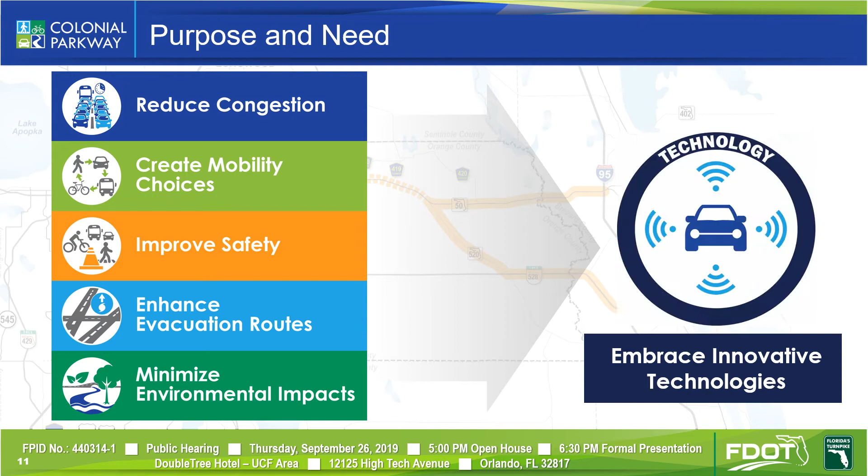The project is located in eastern Orange County along State Road 50, also known as East Colonial Drive. The project starts just west of State Road 408 and follows the existing State Road 50 corridor east until it connects with State Road 520. The length of the project is approximately 9 miles. The existing State Road 50 is 6 lanes from Woodbury Road to Avalon Park Boulevard. East of Avalon Park Boulevard, the 6 lanes reduce to 4 lanes.

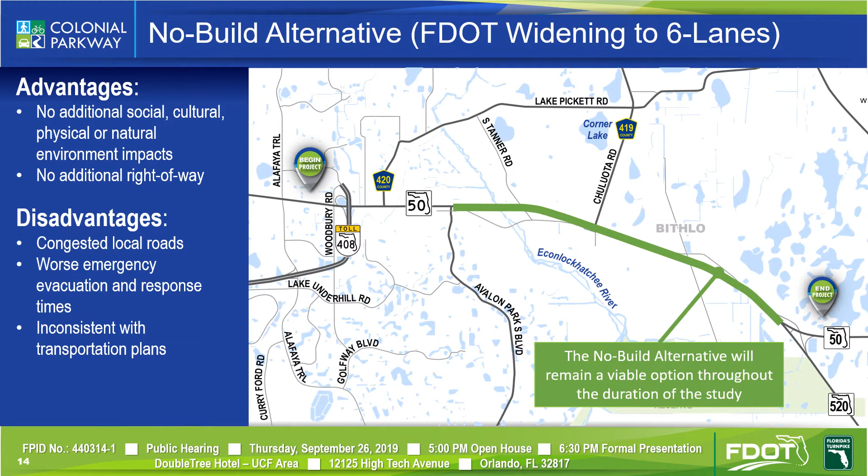The no-build alternative is just as it sounds. What happens if the Colonial Parkway project is not built? For this study, the no-build alternative assumes projects previously approved in the study area would be constructed. Along State Road 50, the no-build alternative includes widening State Road 50 to 6 lanes from Avalon Park Boulevard to State Road 520. The no-build alternative does not include any improvements between Woodbury Road and Avalon Park Boulevard.

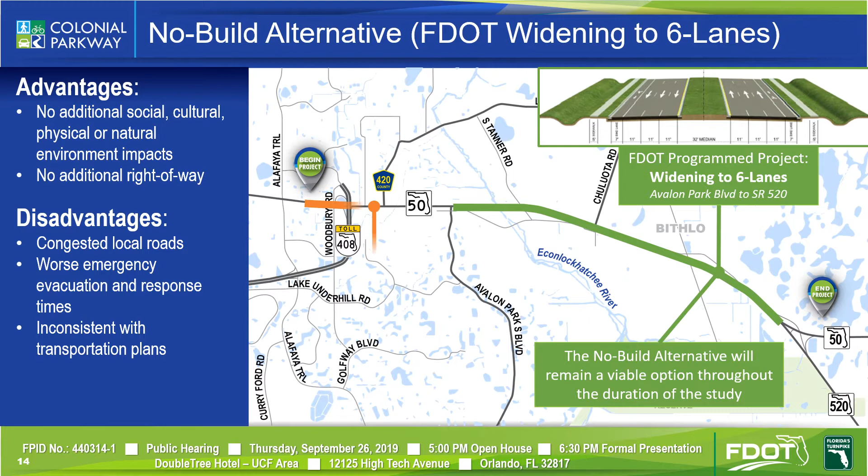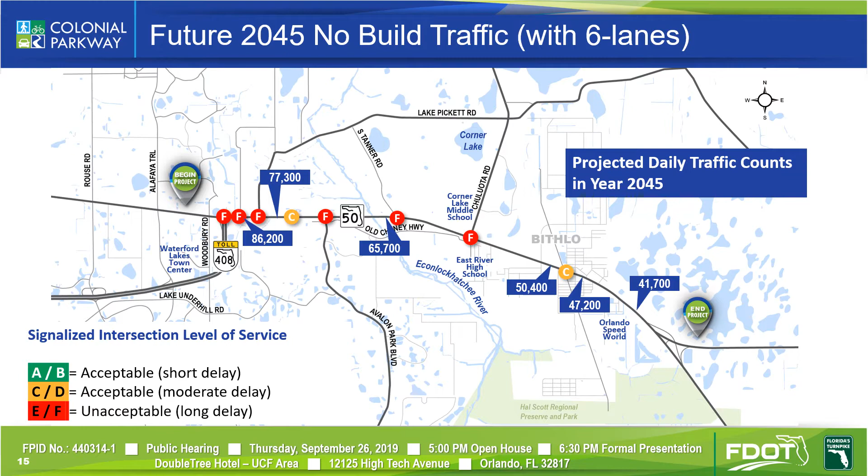Preliminary traffic projections through the year 2045 indicate that State Road 50 west of Chuluota Road and most of the existing State Road 50 intersections will operate over capacity. The no-build alternative does not meet the capacity for the 2045 traffic demand and therefore is not the preferred alternative. Now, let's review the study's preferred alternative. The PD&E study began in September 2017 and was followed by a public kickoff meeting in November 2017. The study alternatives were shown at the public information meeting in May 2018. Since then, study alternatives were refined to decrease environmental and right-of-way impacts to improve the overall design.

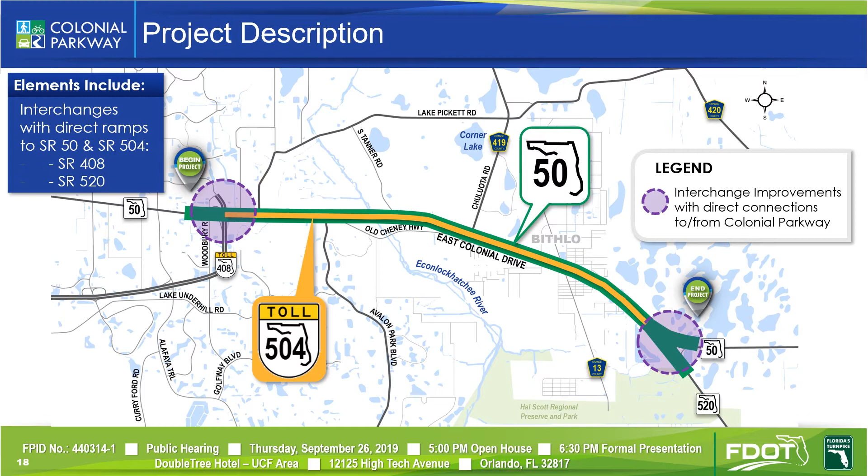The Colonial Parkway proposed improvements include a new tolled facility known as State Road 504 that will be built in the median of the existing State Road 50 corridor. 2 new toll lanes in each direction will be included from State Road 408 to State Road 520, with connectivity to State Road 408 and State Road 520. The project also includes proposed stormwater management facilities such as new ponds and modification of existing ponds.

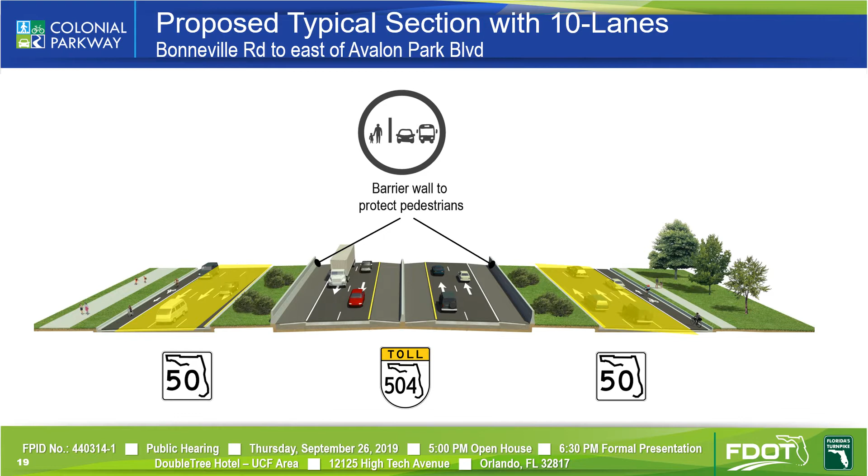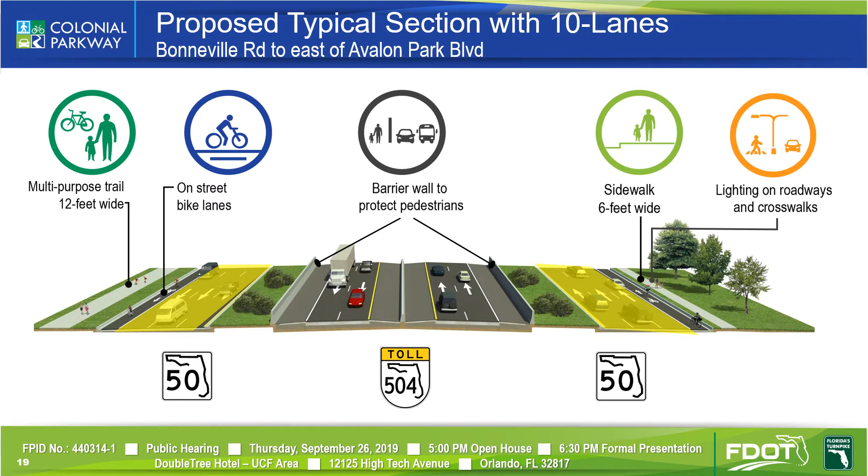The existing State Road 50 lanes will be reconstructed and shifted to the outside as frontage roads. Between State Road 408 and Avalon Park Boulevard, there will be 3 lanes in each direction along State Road 50. Barrier walls will be provided to separate pedestrians from cars. Improvements also include a shared use path, sidewalk, and bike lanes in both directions. Lighting is a key element of reducing bicycle and pedestrian crashes, where over 50% of pedestrian and bicycle-involved crashes occurred after dark within the study corridor.

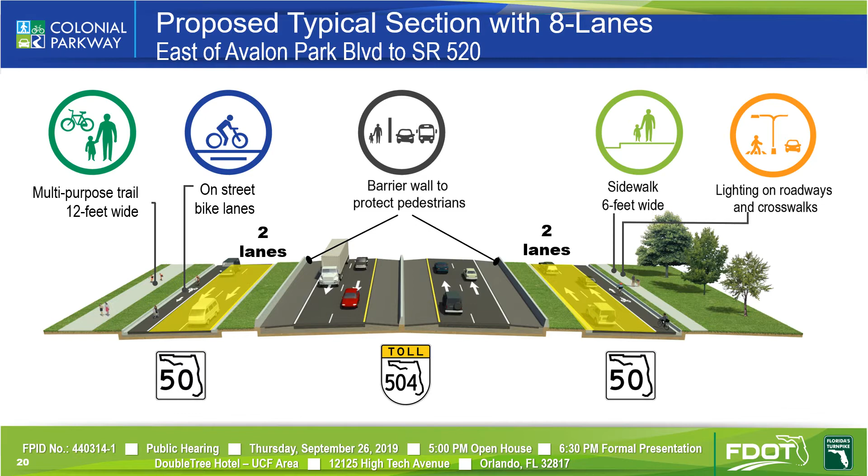East of Avalon Park Boulevard to State Road 520, the existing State Road 50 lanes will be reconstructed with 2 lanes in each direction. When approaching a bridge going over an intersection, the proposed State Road 504 toll lanes will be elevated on fill.

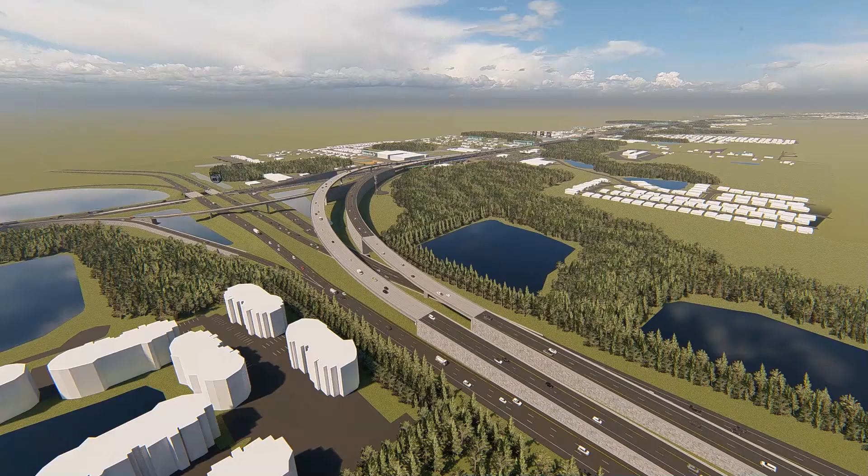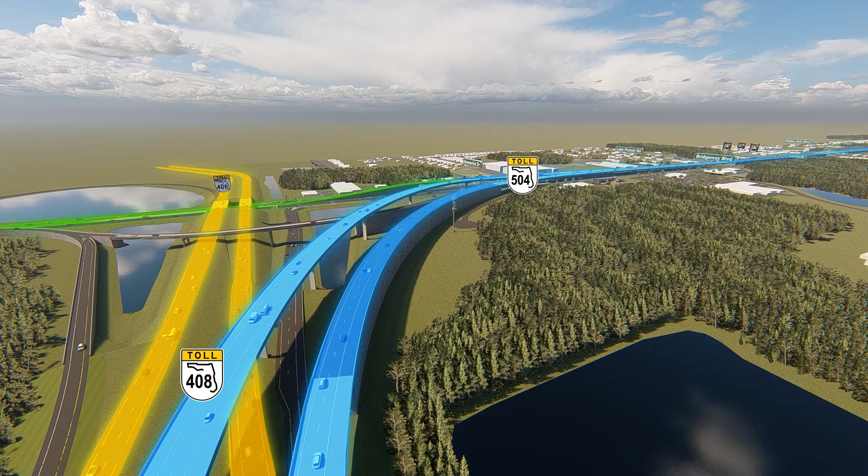To better illustrate how these proposed typical sections might look when constructed, here is a virtual tour of the preferred alternative. The project begins where State Road 408 connects to State Road 50 near Challenger Parkway, as shown by the lines in yellow. The lines in blue show State Road 408 connecting with the new State Road 504 toll lanes. Green lines indicate exit ramps from State Road 504 onto non-tolled State Road 50.

As you continue east, there will be 2 new toll lanes in each direction and 2 to 3 non-tolled lanes in each direction, almost doubling the capacity of the existing corridor. Whether you decide to pay a toll or not, you will have a better option to move through the study area and region.

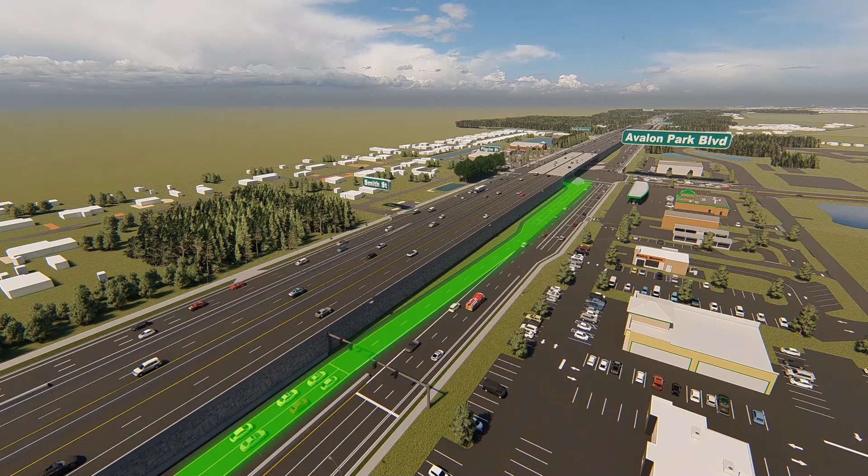Drivers heading east on State Road 504 will have 2 opportunities to exit the toll facility and use the non-tolled State Road 50 lanes. The first is at Avalon Park Boulevard, where drivers can also enter State Road 504 from State Road 50. East of Avalon Park Boulevard, the number of State Road 50 lanes reduce from 3 to 2 in both directions.

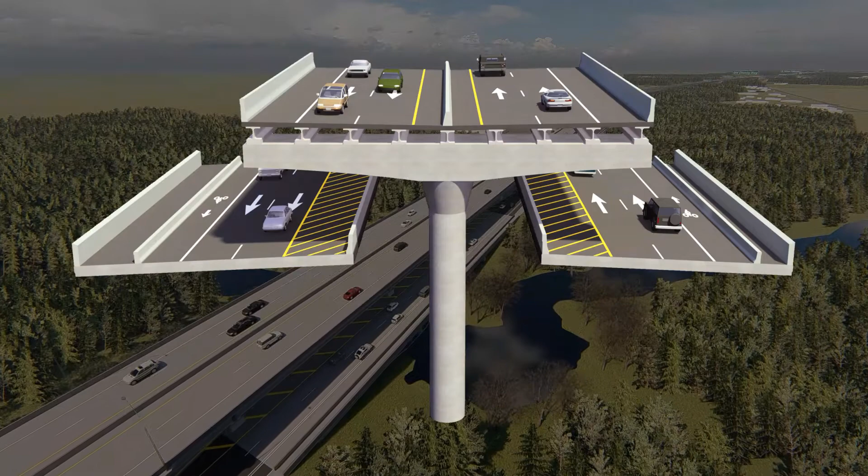The recently completed construction of Econlockhatchee River Bridge is generally preserved. The proposed bridge involves minor widening to the existing structures and constructs State Road 504 directly above the existing State Road 50 bridges.

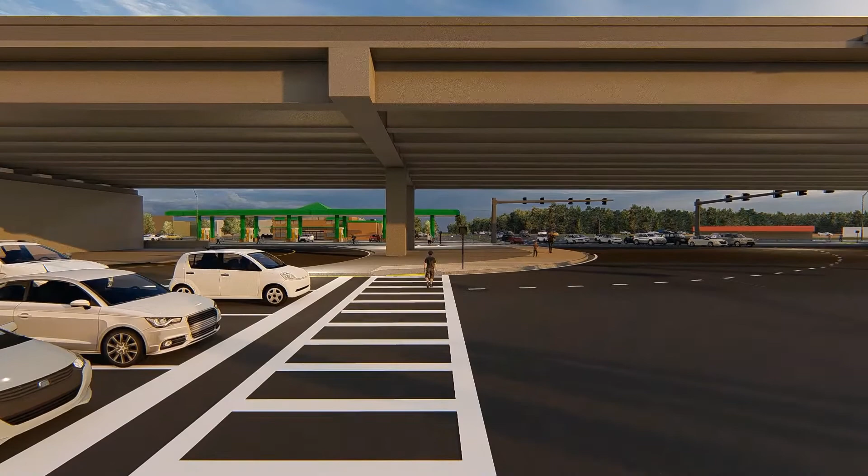Drivers going eastbound will have a second opportunity to exit State Road 504 onto State Road 50 at Chuluota Road. Local State Road 50 vehicles can also enter the toll lanes heading west at Chuluota. To improve safety of vehicle and pedestrian crossings, wide crosswalks are provided along Chuluota Road with pedestrian relief areas between the State Road 50 east and west lanes.

Improved intersections, such as at Chuluota Road, are part of the proposed access modifications to State Road 50, where vehicles will have opportunities to cross over, turn, and make U-turns on State Road 50.

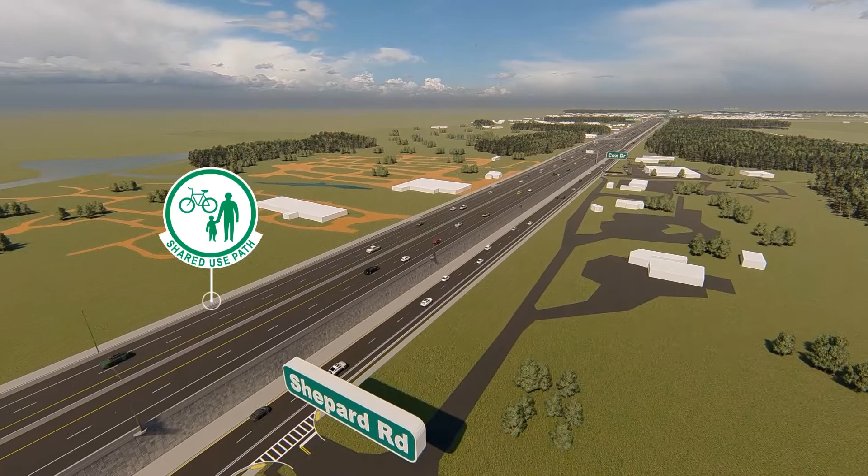As we saw in the typical sections, there is a shared use path for both bicycles and pedestrians on the north side of State Road 50, a sidewalk along the south side of State Road 50, and on-street bike lanes for bicycle travel heading in both directions. These pedestrian and bicycle improvements will connect local businesses and neighborhoods.

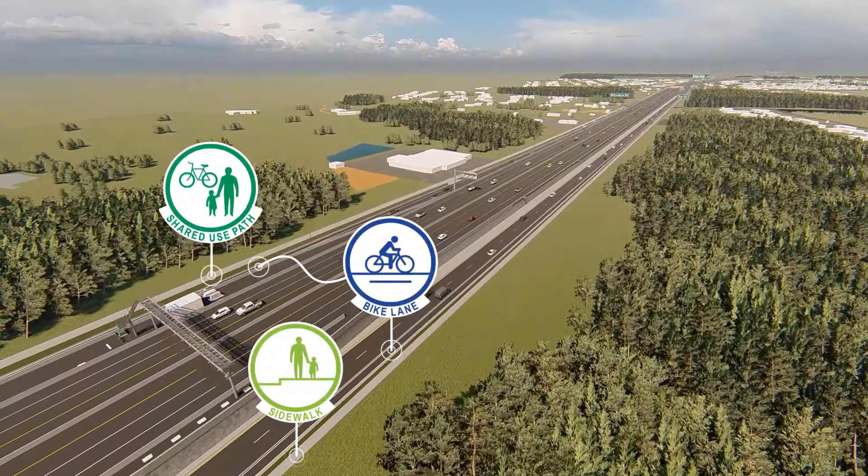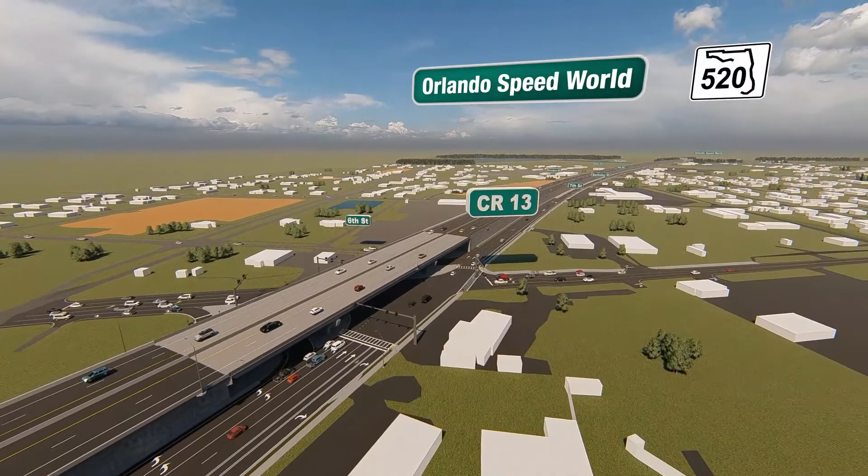Additional median crossing opportunities are proposed at County Road 13 and Orlando Speed World on the way to the connection with State Road 520, where the project ends. As we saw in the video, drivers can access or exit State Road 504 through the interchanges at State Road 408 and 520, and also at 3 local locations shown here: west of Avalon Park Boulevard, east of Avalon Park Boulevard, and west of Chuluota Road.

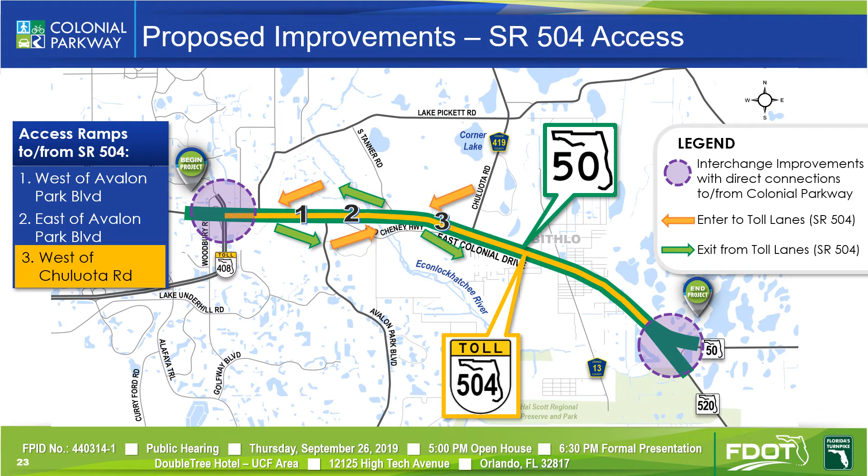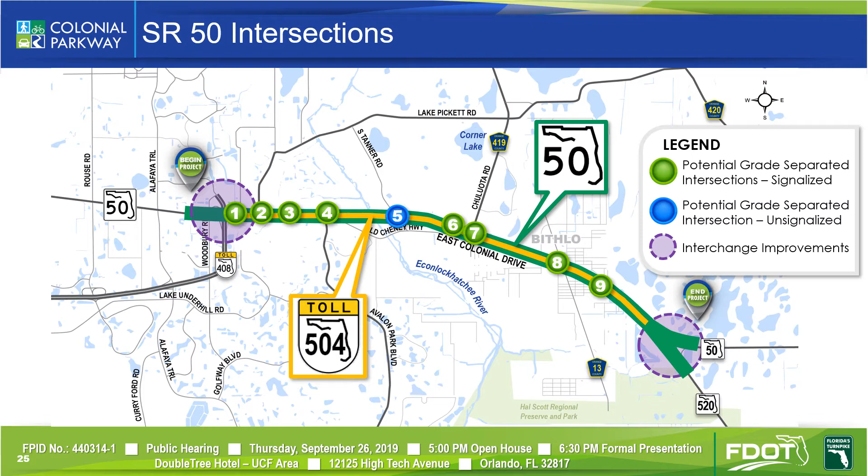State Road 504 will be elevated on bridges to provide safe crossing opportunities at the following intersections: Bonneville Drive, Lake Pickett Road, Pebble Beach Boulevard, Avalon Park Boulevard, South Tanner Road, Future Roadway, Chuluota Road, County Road 13, and the Orlando Speed World entrance. Pedestrians and bicycles can cross at these locations, and State Road 50 vehicles can cross over, turn, or make U-turns.

The preferred alternative was evaluated in detail to analyze potential effects to the social, cultural, natural, and physical environment in accordance with state and federal regulations. These evaluations are documented in the State Environmental Impact Report, or SEIR, available for public review.

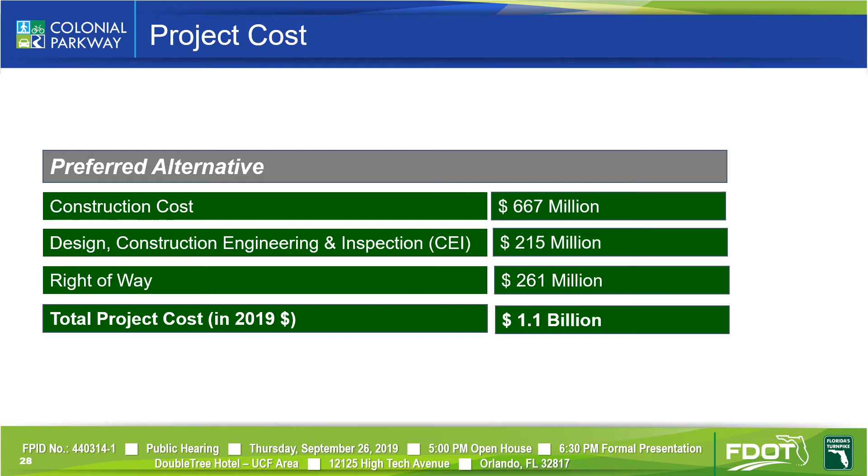The total project cost for the preferred alternative is $1.1 billion in 2019 present-day cost. Included in this estimated cost are design, construction management, and other services. Also included are right-of-way acquisition costs.

One of the unavoidable consequences on a project such as this is the necessary relocation of residential or non-residential sites. On this project, we anticipate the relocation of 21 residential and 55 non-residential sites. All right-of-way acquisition will be conducted in accordance with Florida Statute 339.09 and the Federal Uniform Relocation Assistance and Real Property Acquisition Policies Act of 1970, commonly known as the Uniform Act.

The right-of-way specialists are here tonight and will be happy to answer your questions. If you are required to make any type of move as a result of a Department of Transportation project, you can expect to be treated in a fair and helpful manner and in compliance with the Uniform Relocation Assistance Act.

If a move is required, you will be contacted by an appraiser who will inspect your property. We encourage you to be present during the inspection and provide information about the value of your property. You may also be eligible for relocation advisory services and payment benefits.

If you are being moved and you are unsatisfied with the department's determination of your eligibility for payment or the amount of that payment, you may appeal that determination. You will be promptly furnished necessary forms and notified of the procedures to be followed in making that appeal.

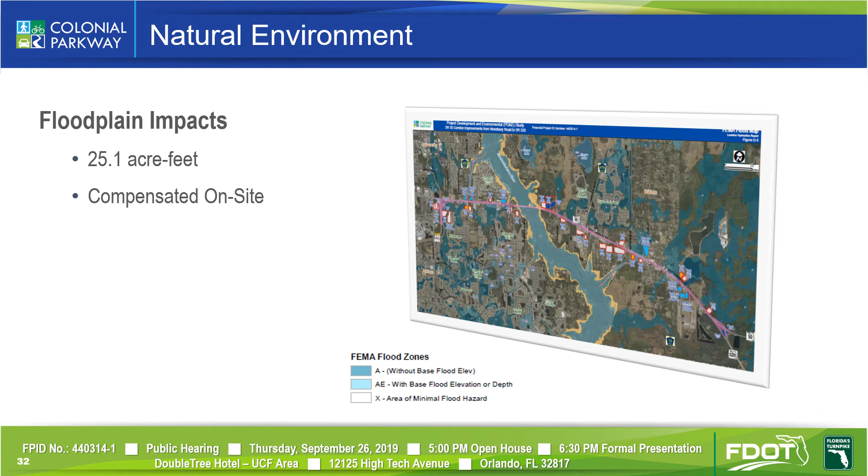25.1 acre-feet of impacts are anticipated to designated floodplains. However, these impacts are negligible when compared to the overall volume of floodplains in the area. Compensation methods, such as the use of floodplain storage ponds, will be provided on-site to minimize potential impacts. Therefore, there is no significant change in flood risk as a result of the proposed widening, and minimal impacts are expected to the 100-year floodplain.

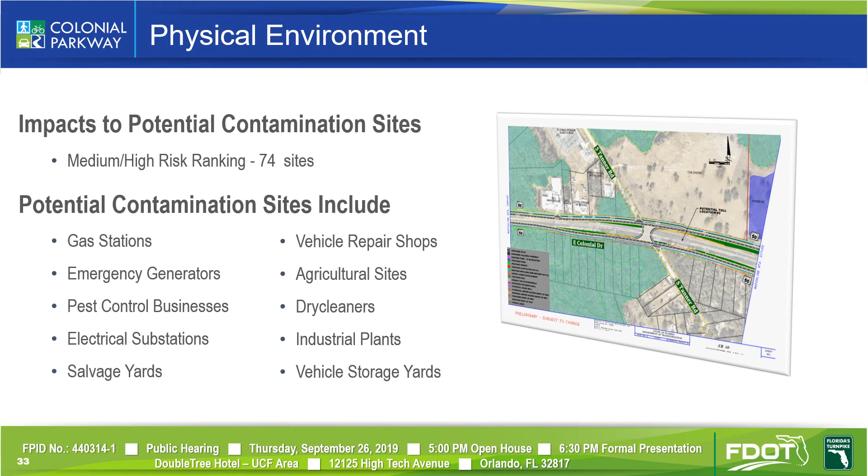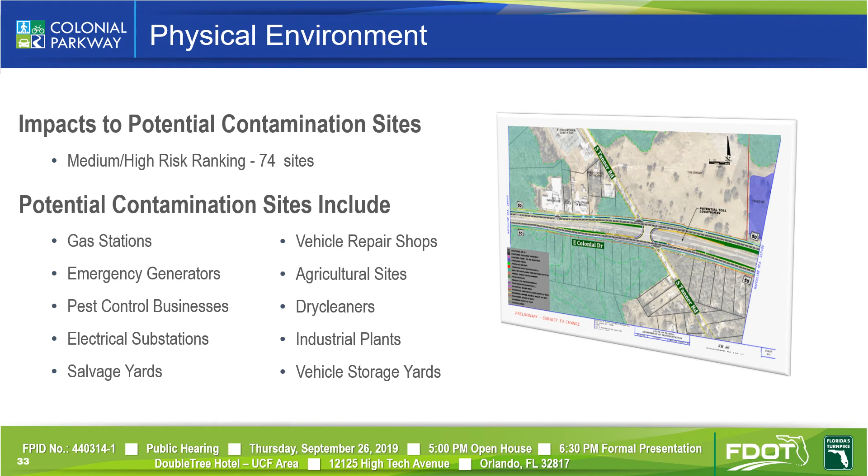Results of the contamination screening showed that 74 sites ranked medium or high could be potentially impacted by the preferred alternative. These sites will be further evaluated during the design phase to identify options to avoid, minimize, or mitigate contamination involvement. Before construction, specially trained crews will address contamination in these areas as required.

During the final design phase of the project, community coordination with the property owners in these locations will take place to determine their viewpoints regarding noise abatement. If you would like more information regarding traffic noise, please speak with one of our noise specialists here tonight.

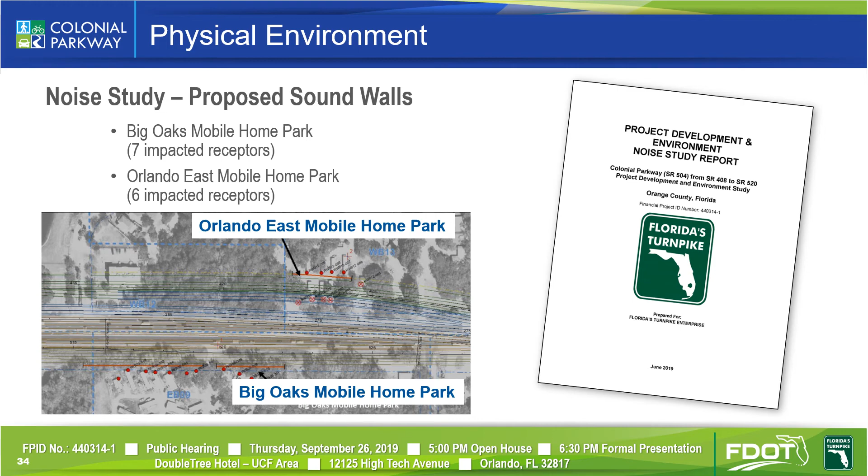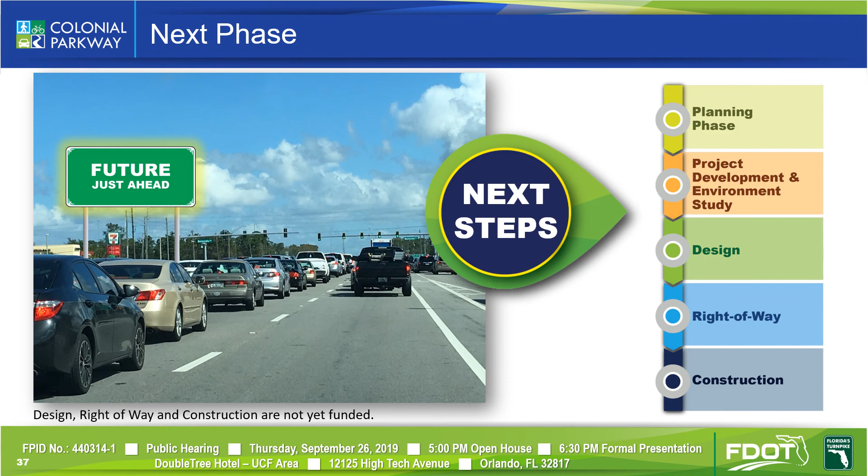Now that we've described the preferred alternative with its potential impacts and benefits, let's review the next steps. The PD&E study was initiated in September 2017 and is expected to be complete by the end of 2019. This study is just one phase in the overall project development process. The next phase is design. Design, right-of-way, and construction are not yet funded.

A verbatim script of tonight's proceedings, together with all written materials received as part of this hearing, and all the displays and informational material provided, will be part of the public hearing record. This concludes the recorded presentation. Now the public comment period will begin.